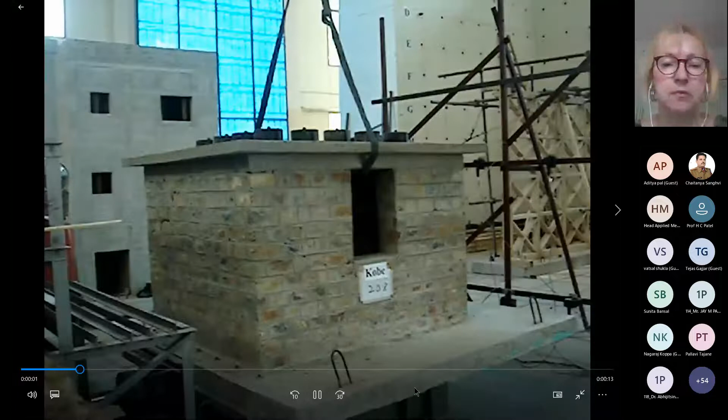Were you able to hear, to see the video? Madam, we can see the video, but the audio is not there. Audio is okay, that's okay, you don't need audio. One more thing, madam, on the screen you can see one stream, so you can press the hide button so that it is not visible on the screen.

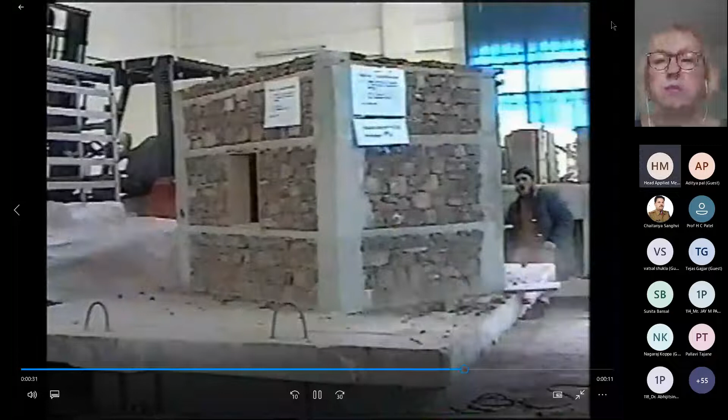Sorry, I was, if I was not, just stop sharing. So I wanted to just show this. This was in the context of the topic of nominally reinforced masonry. I was concerned to exit from the PowerPoint presentation, so I wanted to share. I can repeat this if you want, for some reason, to record it in some other way. But I would now like to proceed with the next presentation.

If you can share this video on WhatsApp, my WhatsApp group, I will share with the participants. I will, those are two videos, both. Yes, and in fact I can also, I have a paper that describes this testing, which is also done by that group from Peshawar. It's worthwhile looking at it.

It just shows the convincing performance. Please note that the reinforced masonry technology had also vertical elements with four bars, which are same as actually confined masonry. So it is in a sense confined stone masonry if you look at it, and really good performance. The tests were done around 2010. So I will share both the videos and the paper that describes the testing with all the details of the accelerations and all that.

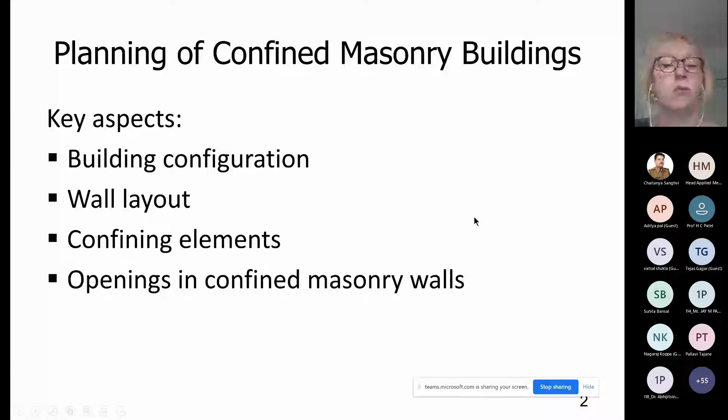There are a few rules regarding building configuration, and they're not specific to masonry. We numbered these rules and labeled them. So rule BC, building configuration 1: plan should be regular whenever possible. If possible, it would be good to have a regular plan like shown on the left-hand side, as opposed to this U-shaped plan, which is common in India, in many buildings, where we have so-called re-entrant corners, circled here, which are a source of additional increased stresses and forces and damage in earthquakes.

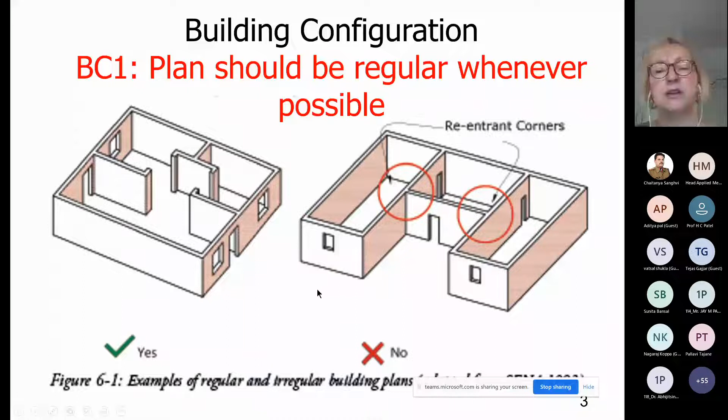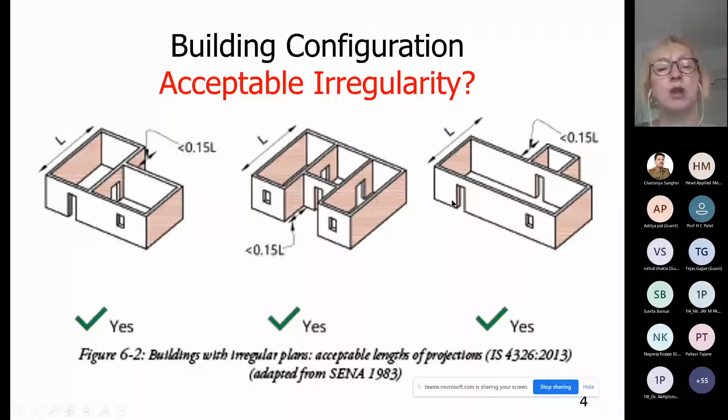Acceptable offsets or irregularities, let's say up to 15% of the length of the dimension we are considering, are shown on these diagrams. What is possible to do, maybe some unrealistic cases like the one on the right, maybe a very small room or something. But anyways, if we have irregularity, we set a limit to it if possible. Or alternatively, for small buildings.

These are conceptual diagrams. It is possible and feasible, if we have larger blocks, let's say schools, to create a separate seismic gap between the blocks, so we get regular rectangular blocks which behave as separate buildings, separate structures in an earthquake. So it's always possible to create these gaps.

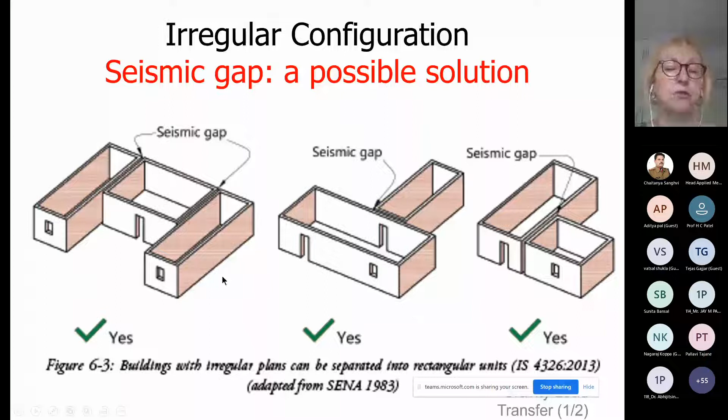Of course, it comes at a cost, because we need to have a double system on each side of the block, like a separate wall on each side to complete each building. There will be some openings, because these are still combined buildings, but for the purpose of seismic design, they will be considered as separate structures.

For example, at IIT Gandhinagar campus, which I will be talking about in the following days as a case study of confined masonry application in India, this is an example of a student hostel. You can see all these different colored blocks are separate. Even though it looks like one building, the different wings are separate structures, and there are gaps at these locations shown here.

Interestingly, the building at the lower right corner is the staircase block. This was designed as a RC frame, reinforced concrete frame, so most of the building is confined masonry except for this. We'll be talking about that, and Mr. Anal Shah will also talk about it as the structural engineer who designed these structures on IIT Gandhinagar campus.

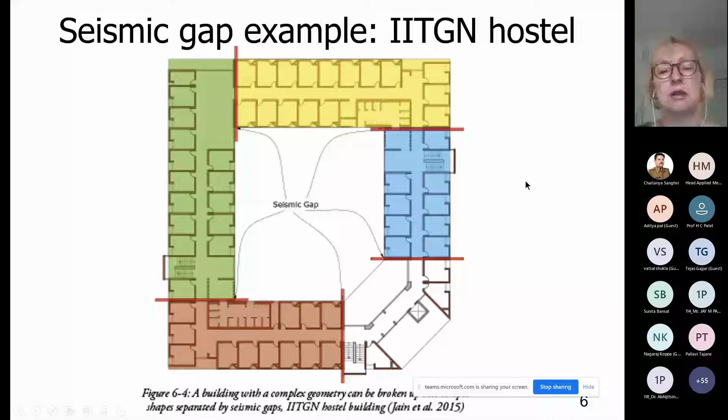The other rule, which is not related to confined masonry but is general when it comes to planning of buildings, is length to width ratio of an individual block or building: the ratio should not be more than 4. That is a general rule, because in very long buildings there may be some unfavorable effects of vibrations due to the length.

It is also true that in long buildings there could be more significant out-of-plane seismic effects. So it's always good to have, as shown here with the green checkmark, a more regular and not too elongated plan shape.

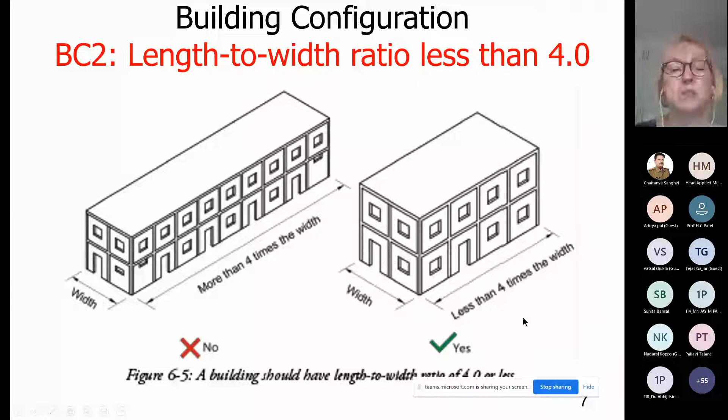So these are all, as I said, figures from the confined masonry book. It is figure 6.5, so you can see even the figure numbers. I hope you will read chapter 6 and get familiar with it. There is accompanying text there.

So adjacent buildings may be in configuration where, if the blocks have different heights, they must be separated by a seismic gap. It is recommended anyway, and the size of the gap is usually prescribed by the codes, so that if the two buildings vibrate out of phase, there is no pounding or collision between the blocks. This is a little exaggerated on the right-hand side, but shows a sufficient gap size.

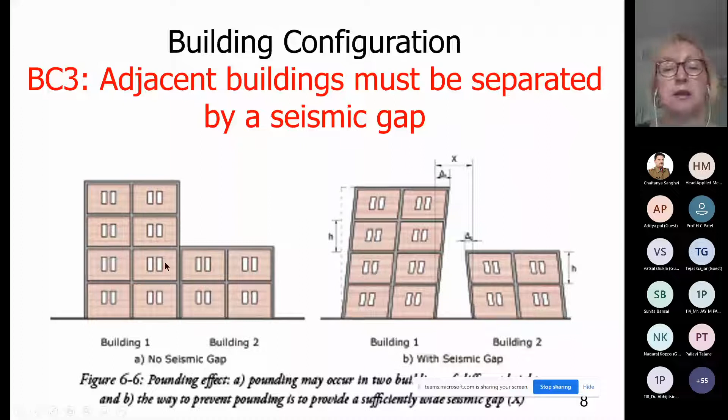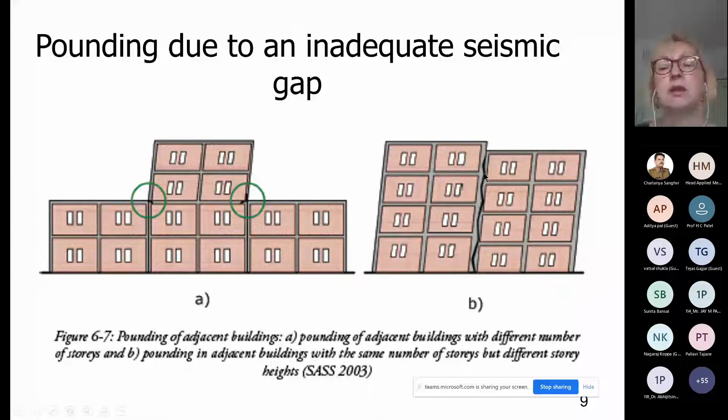Pounding is very common in earthquake situations. This is an example of pounding. It can happen if buildings have different heights, or if buildings have similar heights but, as in diagram B, the floor levels are different. So if buildings are adjacent and there is no sufficient gap, at least the floors should be at the same level, meaning the floor heights need to be the same.

What is very important for wall structures is that there is continuity of walls from the ground to the roof. So the drawing on the left is not acceptable, while the drawing on the right is a must. We must have continuous walls; walls cannot be offset in a masonry building.

Perhaps this kind of situation may be acceptable in concrete frame structures, though I think it wouldn't be acceptable in frame structures either. But in wall structures, the walls are the key elements and have to be continuous. Maybe partition walls could be offset, but load-bearing walls have to be continuous.

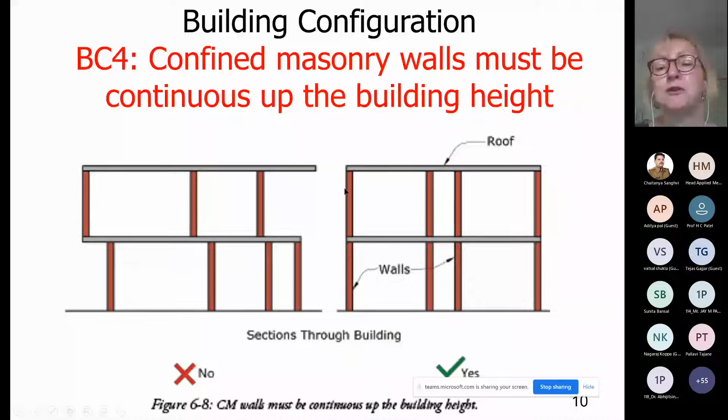Here is an interesting point, which I think is particularly relevant since India is at the beginning of applying confined masonry: buildings with open ground floors. There are many of them in Ahmedabad, and everywhere in India, in all cities, because they're used as parkades.

Nowadays more buildings have underground levels, which is good. But if a building doesn't have an underground level, in many cases the ground floor is left open in reinforced concrete frame buildings, used for parking. We know these buildings performed poorly in the 2001 Bhuj earthquake—a number of buildings in Ahmedabad of that type collapsed. And still many buildings are being built with that feature.

So in confined masonry, it is a big no to have an open ground floor. In that case, you would need a reinforced concrete frame system at the ground floor, since it wouldn't be confined masonry anymore, with confined masonry on the upper floors. This so-called hybrid system is not permitted in confined masonry, and not permitted by the code. Confined masonry can only be done with a continuous system, continuous walls from the ground to the top.

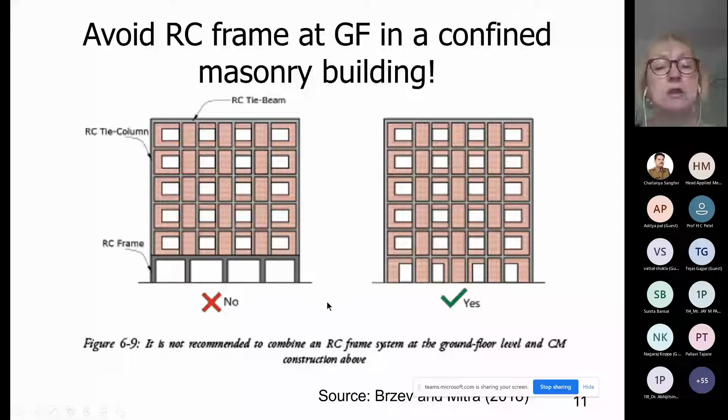This poor performance or collapse of buildings with the hybrid system has been documented in China after the 2008 Wenchuan earthquake—there's a paper in the book that clearly shows the performance of these buildings. I also visited Albania after the 2019 earthquake, and they had exactly the same system with an open ground floor.

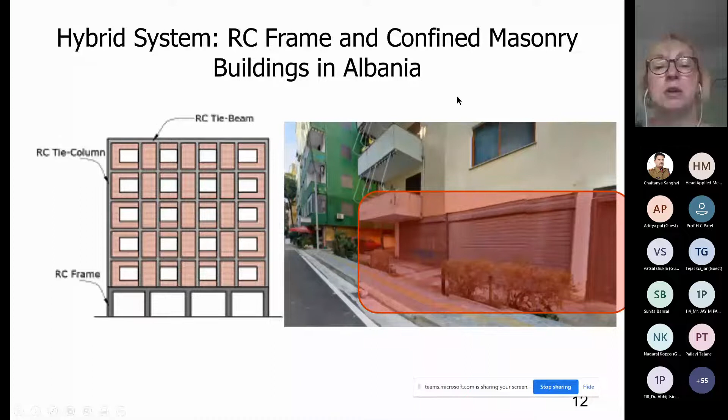As I said, this is also very well documented in papers from China after the 2008 earthquake. Confined masonry buildings in China performed very well, except for buildings with this hybrid system. So it's very important not to consider it at all as an option for confined masonry buildings in India—it is not permitted.

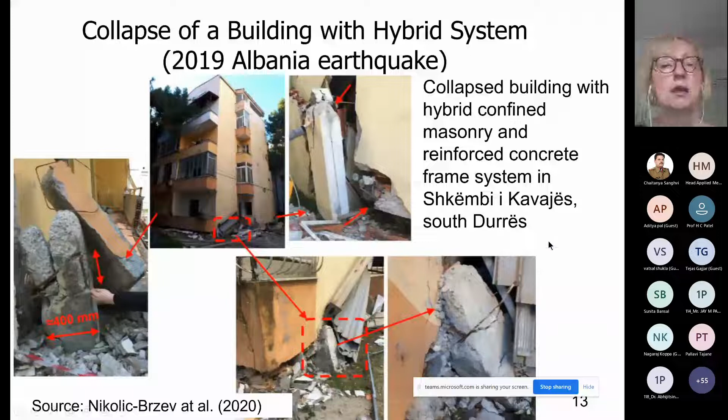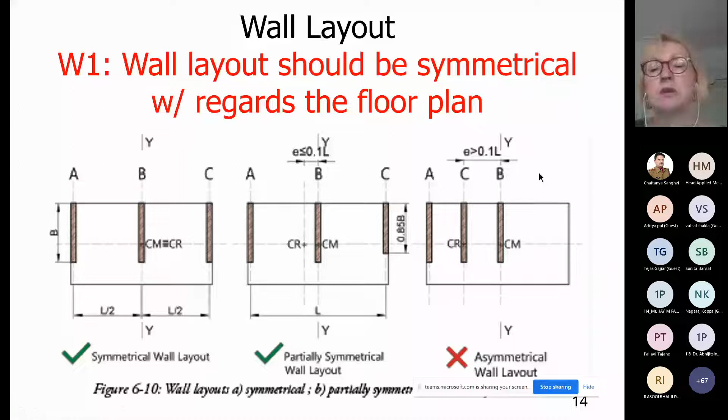This large eccentricity between center of rigidity and center of mass causes torsional effects. These effects and the increased forces from torsional displacements can be controlled by design, but it is not favorable—it's not desirable, though necessary in some situations. These are recommendations, but in real design it's not always possible to follow them. Another important aspect for all masonry buildings, including confined masonry, is that a minimum of two parallel lines of walls is necessary in each direction.

This is usually a part of the codes. We cannot have less than 2 load-bearing walls, which in this case are confined. That is the minimum, even in smaller buildings. Let's say we have a building with 4 walls, that means we have 2 walls in one direction and 2 walls in the other direction. So this is that box type structure.

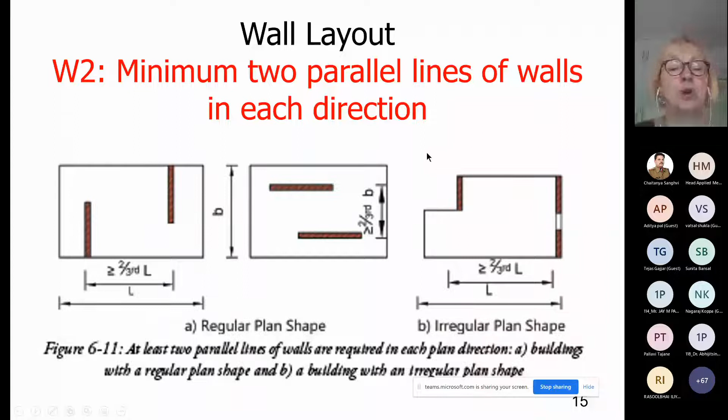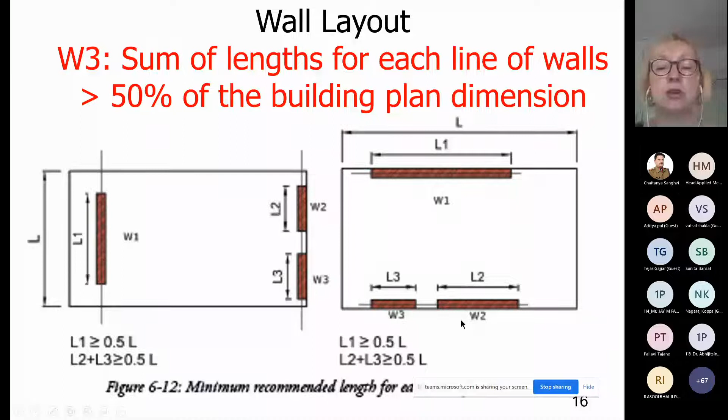Finally, if we have separate walls, like W2 and W3 shown here, the sum of lengths of these walls has to be greater than half of the length of the side of the building L. If you have 1 wall, the length should be greater than half of that length. If you have 2 walls, when we add their lengths, they should be larger. In other words, most of the line has to be covered by the walls, it must be supported by the wall. This is the same shown for both directions. These diagrams are exactly identical, except that they show walls in vertical and horizontal direction, the way it is shown on this plan.

Now we are talking about confining elements, and in the code we will show some recommendations from the masonry guide, not from the code, but I believe the IS code would have similar dimensions. When giving an overview of the code, I will show you where this part is, so you don't need to memorize, you can check.

Here are some rules for tie columns. So obviously in the confined masonry wall, we have 2 tie columns and a tie beam. I consider this tie beam as a tie beam at the floor level. An additional band is not considered as a tie beam, it is just a band, which is a provision, but tie beam is at floor level or roof level.

Tie column dimensions are as prescribed by EERI guide and I believe by Indian code: the length is at least 150 millimeters and the other dimension is 110, which means it will be possible to construct a half brick thick wall. But from the practical point of view, this is next to impossible because we need 4 bars and it will be very difficult to construct 4 bars at such a small size. That's why I said that in most applications I would expect to have 230 by 230 millimeter size tie columns.

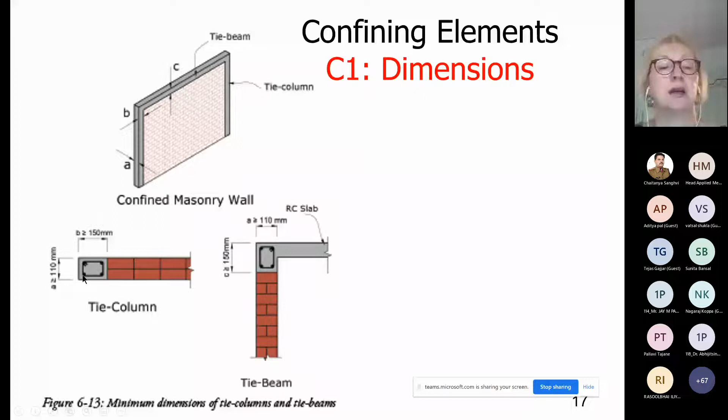So that beam at the edge would serve the purpose of the tie beam, it is not a separate beam. Only, as we will see in confined masonry, the tie beam would only work for tension and compression, it would not act in bending or shear. That is the only difference. Otherwise it looks the same as the beam that would anyway be part of the floor system, which is nice. Tie column is extra, obviously, it would not be a part of the RC floor system, it is a vertical element anyway, but that is it.

It is true that even though we don't consider this wall, it will take part, it will resist part of seismic forces, but we simply don't consider it. That is how it is.

That is also another very important rule. So in planning of, for example, IIT Gandhinagar campus, not every wall in the building that I've shown and the other buildings were considered as confined. They are part of confined masonry buildings, but walls were not treated as confined masonry walls.

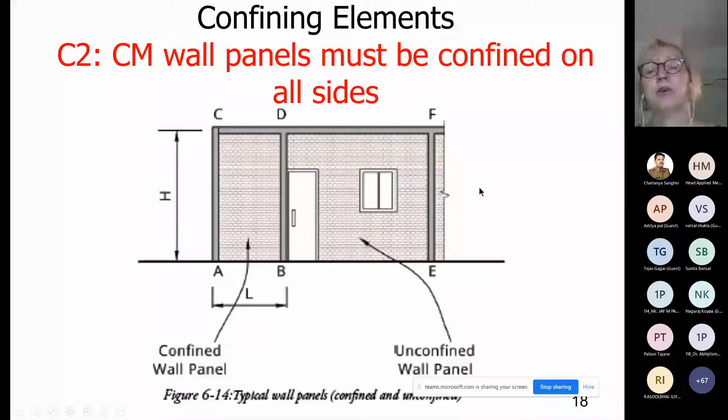So these are now the rules that are included in that chapter 6 and also, as I said, in the code, and they are now numbered. So this is more specific than what is shown in the previous lecture.

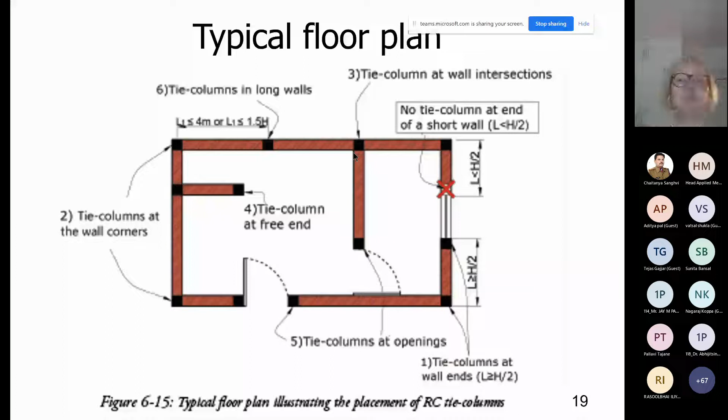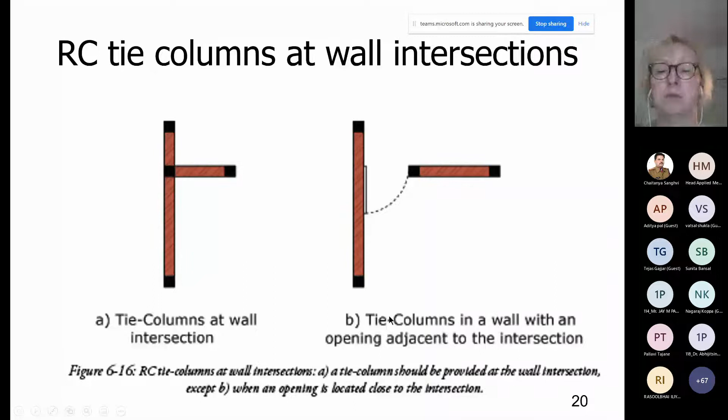This is an example from the IIT Gandhinagar campus construction: if we have an opening in the wall, then we don't need to have confinement at the end of that cross wall, as shown in diagram B. You can see on the left wall, because there is a solid wall, there is confinement at the wall intersections. In this case, when we have an opening, we can have the first tie column at the end of the opening. There is no need for an extra one, unless this vertical wall is very long, in which case there would be a need for an extra tie column. We had this discussion during the planning of the IIT Gandhinagar campus. So that is an interesting rule.

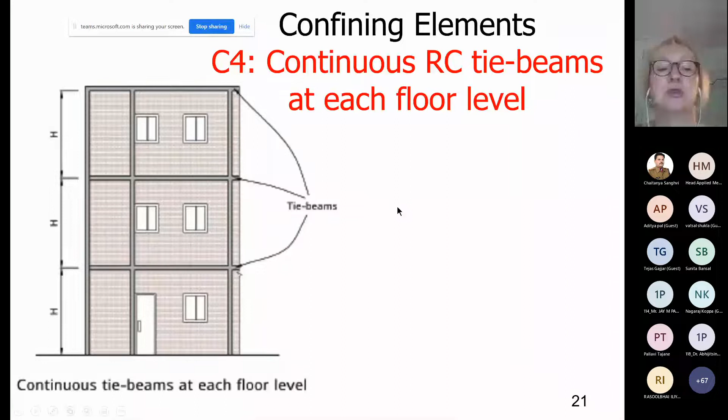And we talked about continuous tie beams at each floor level. As I said, you can consider these tie beams as parts of a floor system, as a floor structure. In India, it is required to have a lintel band when the floor height is more than 2.5 meters, and that is the case in practically all cases. So I would expect that all confined masonry buildings in India will have an RC lintel band in addition to this beam. This would be an extra expenditure in confined masonry, which is not there in other countries, but it is simply based on Indian practice to date on reinforcing masonry.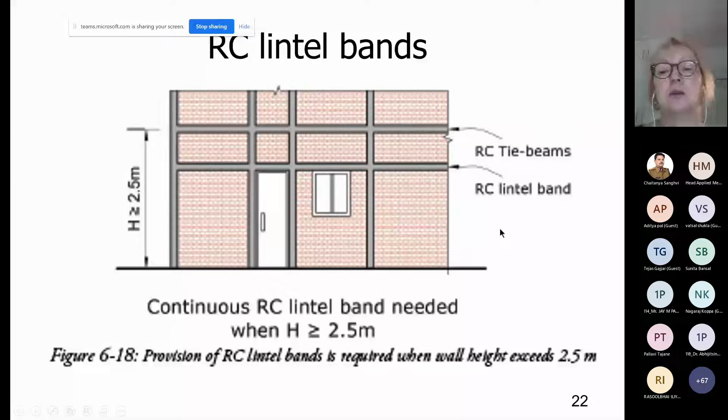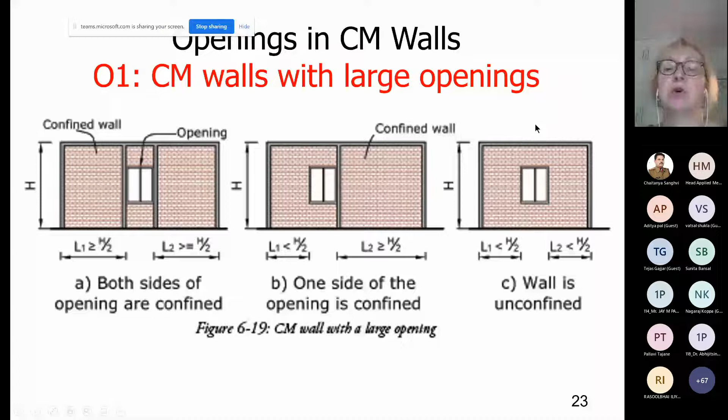The third, diagram C, shows a wall which is confined only at the ends, but not confined at the openings. Also, the distance between the end of the wall and the opening is less than height over 2 (height being the wall height at floor level). Therefore, this wall is unconfined, so it would be disregarded or not considered in the seismic force calculations and distribution. It would not be assigned any seismic forces. Of course, it is there, it would carry gravity loads and would also resist some seismic loads, but it would not be designed for seismic loads. So it is maybe also a margin of safety to disregard some of these walls, even though they will take some loading.

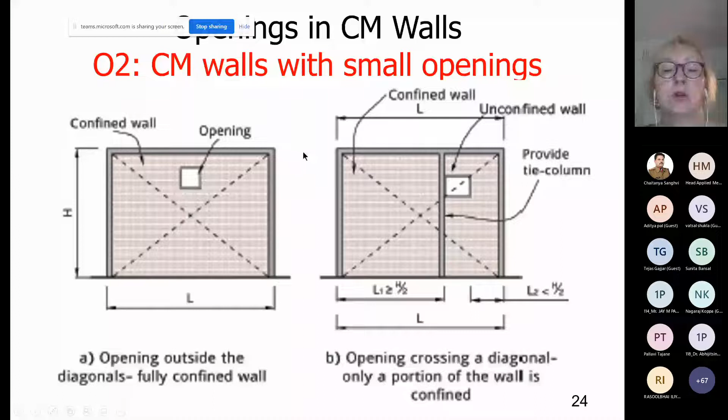If it is on the diagonals, like in diagram B, then we can put a confinement. The part that is solid without openings will be considered as confined wall, while the part on the right-hand side of the opening is not considered confined. So you can see confined wall, unconfined wall. In this case of small openings, we don't need to model openings or include them. We will just consider this as a solid wall, which would be sufficiently good for design.

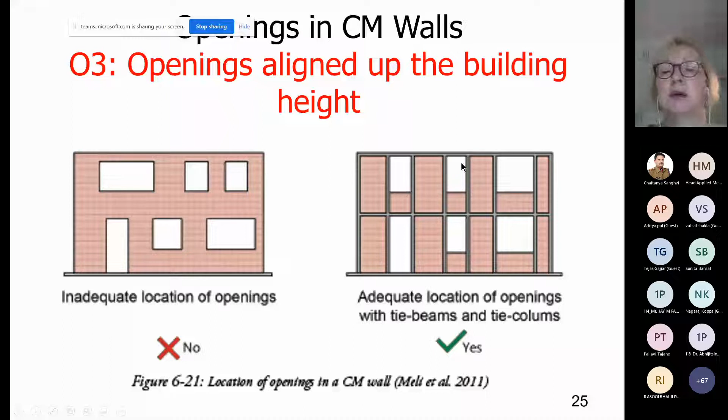Openings need to be aligned. That is a rule about openings - they have to be aligned up the building height. The drawing on the left shows scattered openings which are offset from one floor to the other. In confined masonry, we need to have openings aligned vertically so that we can place confining elements continuously up the building height. That is critical in planning of confined masonry buildings.

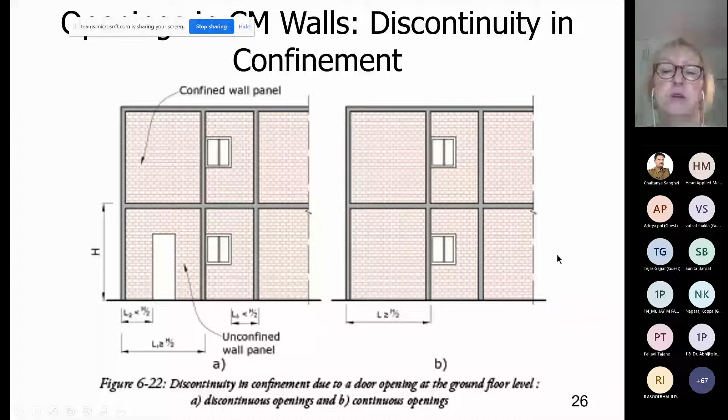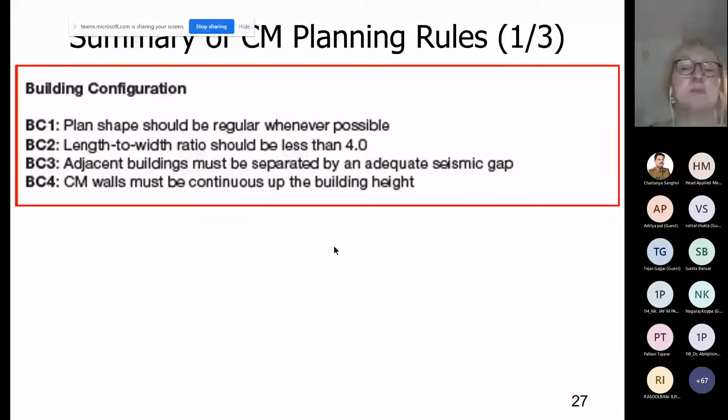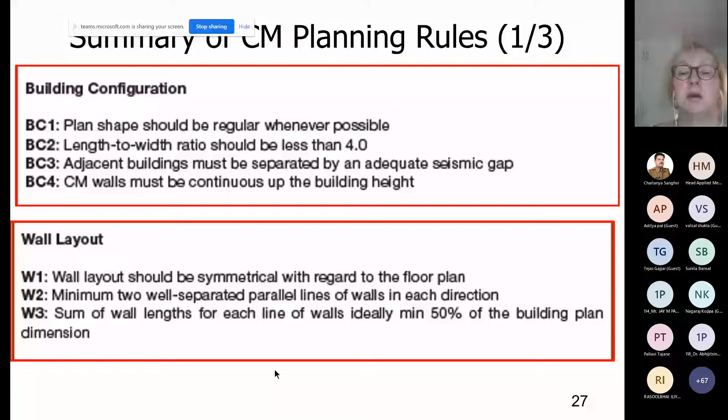Regarding wall layout rules: wall layout should be as symmetrical as possible with regards to the center of the floor plan, the centroid of the floor plan. Minimum 2 well-separated parallel lines of walls are necessary in each direction, and also the sum of wall lengths for each line of walls should ideally be a minimum 50% of the building plan dimension.

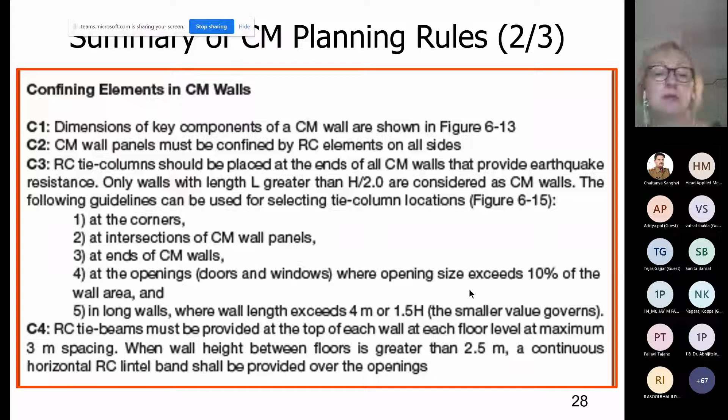Confining elements in confined masonry walls - C1, dimensions of key components are shown. Wall panels must be confined by reinforced concrete elements on all sides. Rule C3 is about the locations of tie columns, which are shown and summarized - they were shown on the plan drawing. Rule C4 is that reinforced concrete tie beams must be provided on top of each wall at each floor level at maximum 3 meter spacing. When wall height between floors is greater than 2.5 meters, a continuous horizontal band shall be provided over the openings.

Finally, a few rules regarding openings. Rule O1: tie columns should be placed at both sides of any opening with an area of more than 10% of the wall surface area for one confined masonry wall. Otherwise, the wall should not be considered as a confined wall. The second rule is for walls with small openings - if the opening is outside the diagonal, it can be ignored. When it is on the panel diagonal, an RC tie column must be provided at the opening, otherwise the wall is not confined.

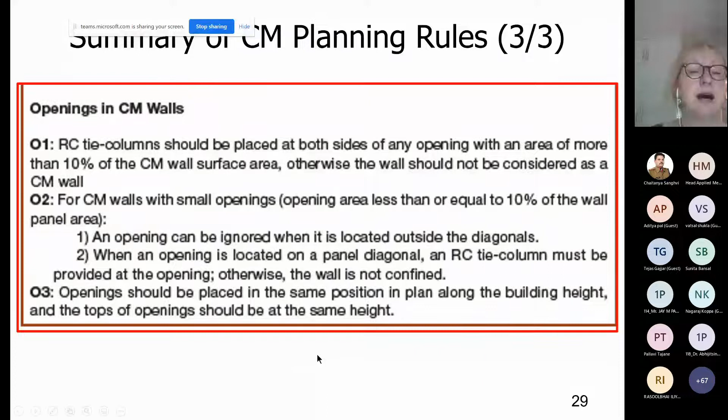O3: openings should be placed in the same position in plan along the building height, and the tops of openings should be at the same height - that is what is shown. So that is all about this planning of confined masonry buildings. It is all explained in detail in chapter 6 of the book, which is also assigned reading for you in preparation for tomorrow's classes. Now the second topic, which will be just a few slides but maybe more discussion and explanation, is load transfer or force transfer in confined masonry buildings. I put masonry buildings because it is the same whether it is confined or any other form of masonry building.

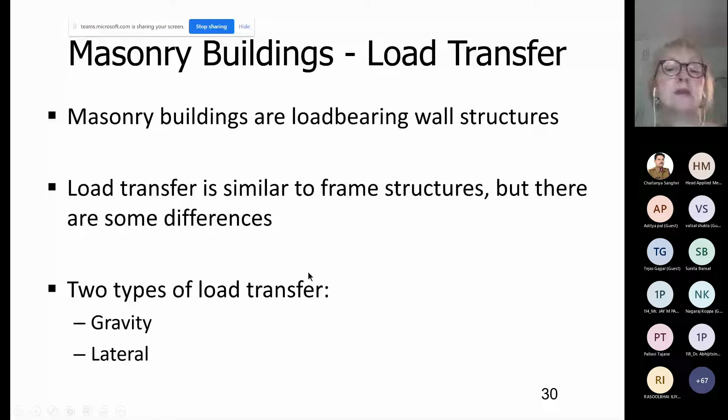Masonry buildings are load-bearing wall structures. Load transfer is similar to frame structures in some ways, but there are differences. There are two types of load transfer: gravity loads and lateral loads.

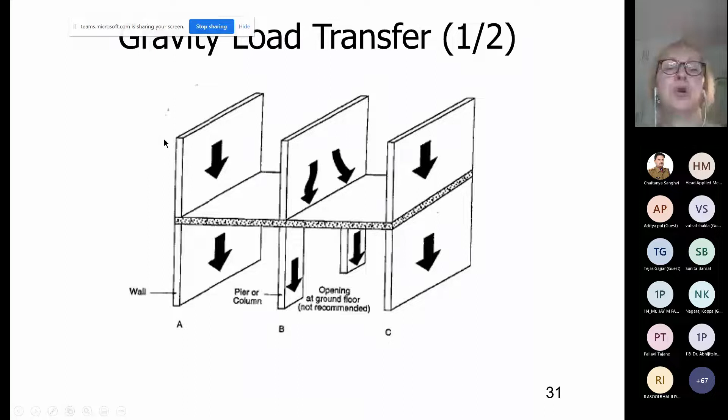For gravity loads, if you have floors or a roof above, all the loads will be transferred to the walls. That's why they're called load-bearing walls. How do we calculate the loads in the walls due to these vertical loads?

It is similar — this is a parallel comparison between the wall system and frame system. Let's imagine in grid line AB there is a wall. The tributary area for the wall would be half of the length span on each side of the wall, between that wall and adjacent walls, whereas for columns it would be equal to the span on the other side.

Whereas in a reinforced concrete frame system, the tributary area would be square or rectangular shaped on all four sides around the column. So that is the difference, but the concept is exactly the same. For the column, we take tributary area in one direction and the other, the same as for the wall tributary area — the concept is exactly the same.

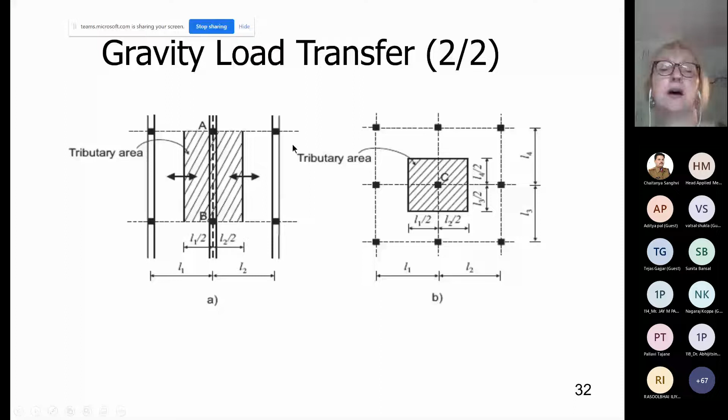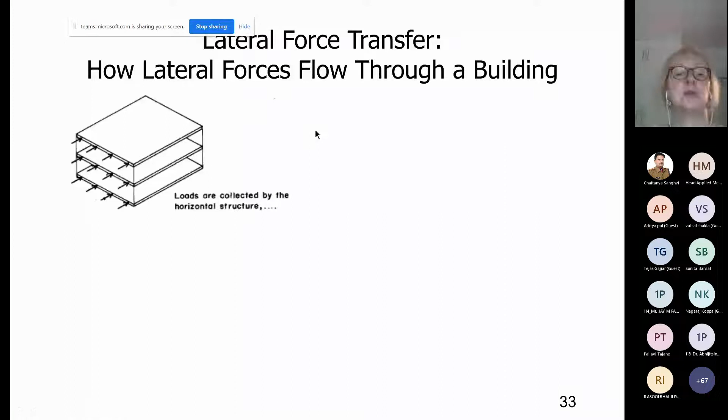That is the message. When it comes to lateral force transfer, or how lateral forces flow through a masonry building, first the loads are transferred to the horizontal elements, which are diaphragms — as we discussed, at the roof and floor level, in case of reinforced concrete slabs.

These diaphragms act — imagine we have walls only at the ends of this building. These end walls act as supports for the diaphragms, for this horizontal loading, and the reactions of this loading, shown in this diagram, are actually the forces that go onto the walls.

You can see the forces transferred at each floor level from the diaphragms to the walls. In this simple case there are only two walls at the ends of the building, but there could be many more. Through this course we will go over the rules or principles by which we can calculate forces in the walls through hand calculations, or numerical models using SAP 2000 software, for which I believe you got the license.

So we have three steps here. Step one: loads are collected by the horizontal structure, the diaphragms. Step two: diaphragms transfer the load to the walls. Step three: we need to consider these loads due to lateral loading in the walls, and design the walls for shear and bending due to lateral loads, and also for axial load or gravity load, as discussed earlier.

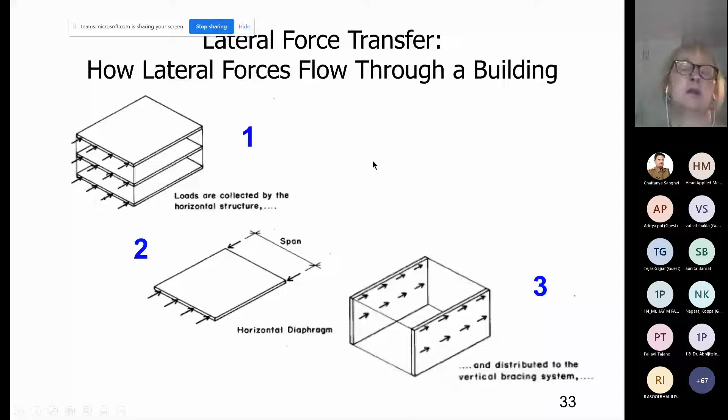Planning of the building is very important both for engineers and architects. In some cases architects may not be educated on this — as we learned, there are challenges in the curriculum of engineering and architectural programs, where they may not have any education related to seismic planning in high seismic zones. That's why you, engineering students, future engineers, practicing engineers, and engineering professors are there to educate them.

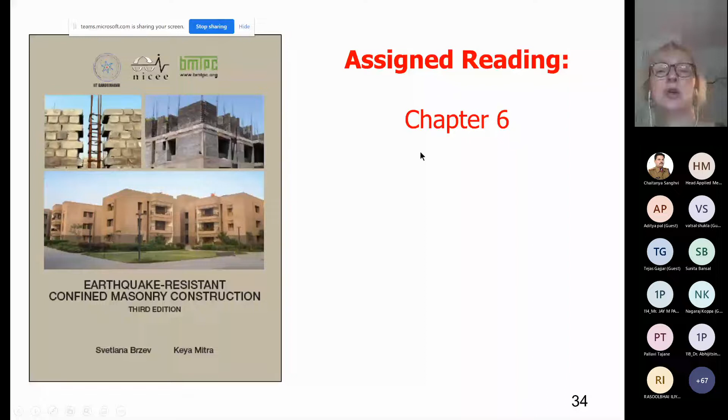In this book, chapter 6 is dedicated to planning, and you will need to go over it. All the illustrations given in this lecture are in chapter 6 of the book. And that is all for this lecture, which was related to planning. Do you have any questions?

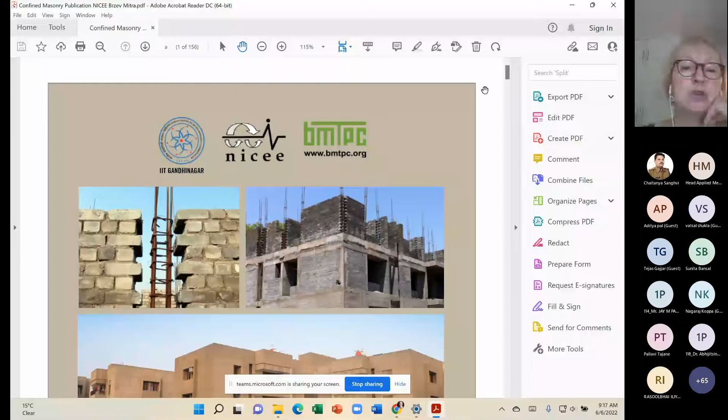So I will go over the book a little bit before — in the meantime you can prepare your questions — and give a little bit of history about it as well. So, as I mentioned, the first confined masonry publication, a larger publication called a monograph, was developed in 2007. I wrote it.

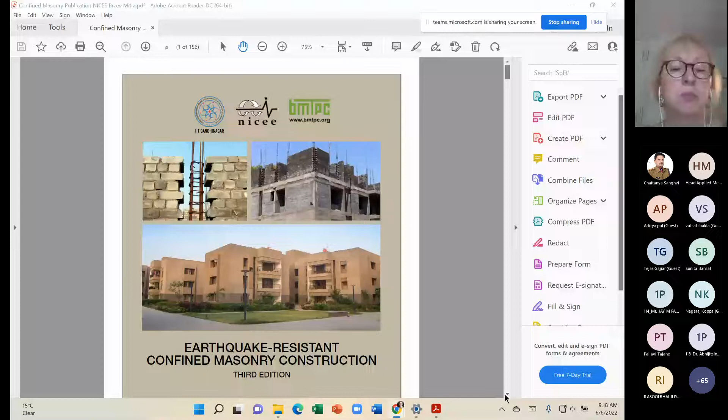I was in India as part of the NPEEE program, convened by Professor Sudhir Jain at IIT Kanpur, where I spent about 3 weeks. I was requested by Professor Jain, Murty, and Rai to write a publication on confined masonry, because at that time there was no experience on confined masonry in India. I wrote the first version of that book, which is available in electronic form on the NICEE website and was also published by NICEE in printed form.

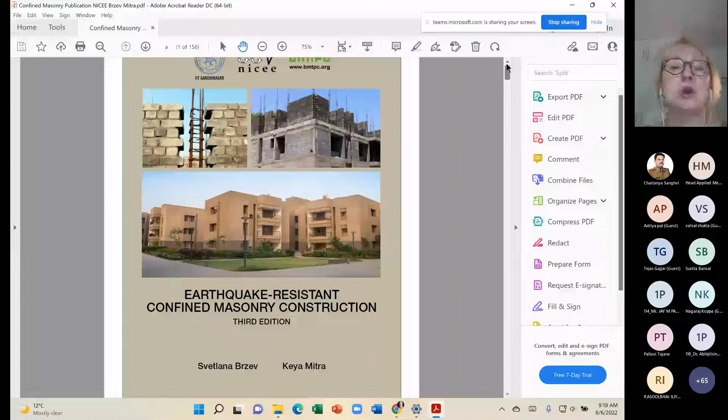On the cover page there is a lot of information and graphics from the construction of the IIT Gandhinagar campus, such as this housing at IIT Gandhinagar campus, and these construction photos of confined masonry buildings.

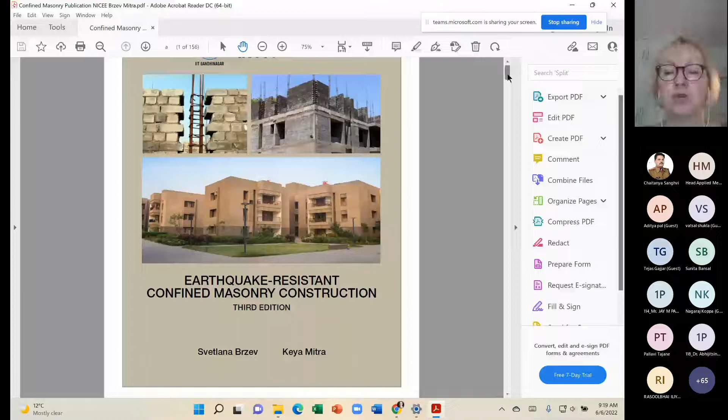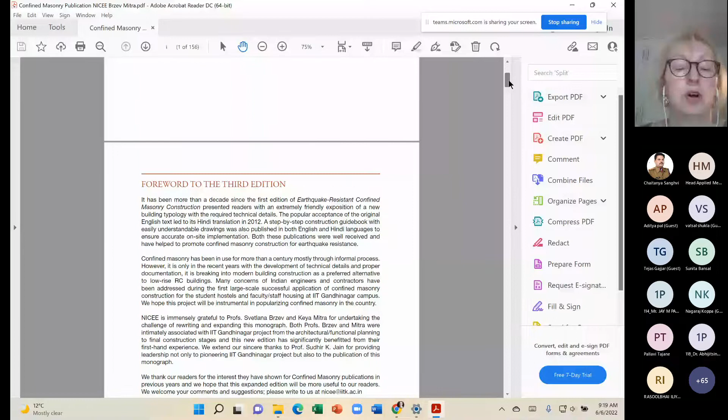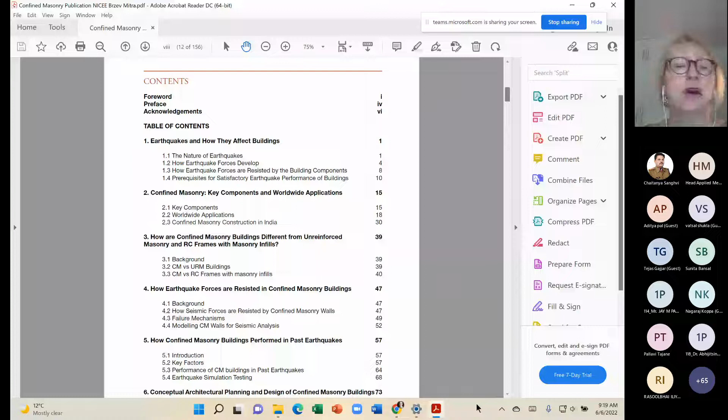This publication has around 150 pages. I'll go over the table of contents to introduce it to you. The first chapter is general, on earthquakes and how they affect buildings, how earthquake forces develop — a basic introduction to earthquake engineering, only the first 10 pages or so.

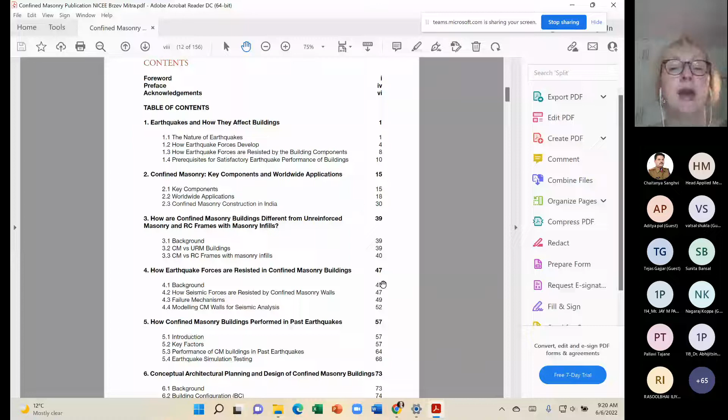The second chapter is about confined masonry, its key components, and worldwide applications — you will see examples of confined masonry construction around the world. The third chapter, which I also assigned to you to read, covers how confined masonry buildings differ from unreinforced masonry, and how they differ from reinforced concrete frames with masonry infills.

The fourth chapter is on how earthquake forces are resisted in confined masonry buildings. We will talk about this as part of seismic design, the topic of designing confined masonry buildings, later this week.

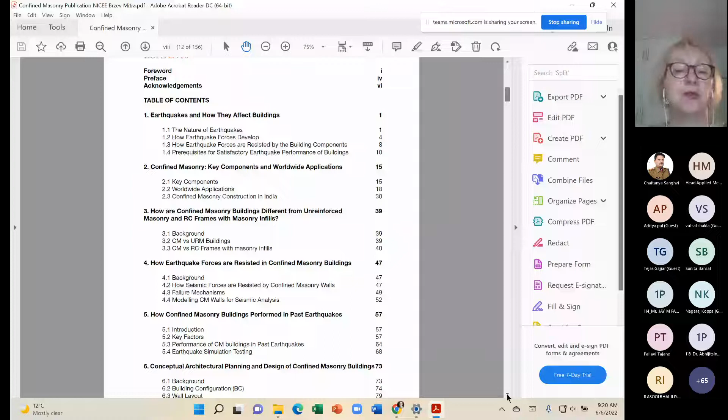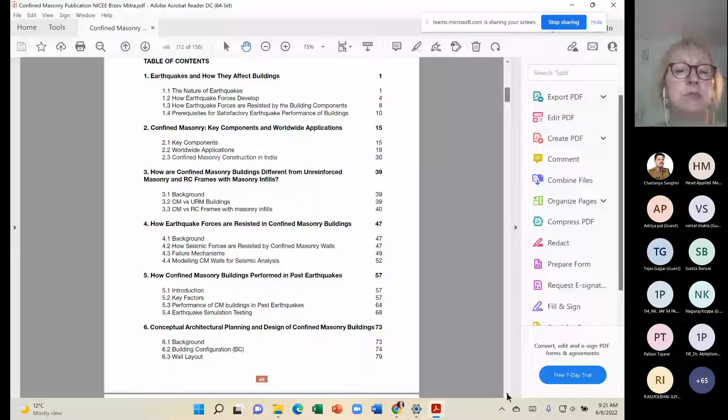We will also have a presentation on how confined masonry buildings performed in past earthquakes — that's chapter 5 in this publication, though I'll show photographs not necessarily only from the publication, as I have my own photographs too. All these chapters are really important to understand the behavior and performance of confined masonry buildings in past earthquakes.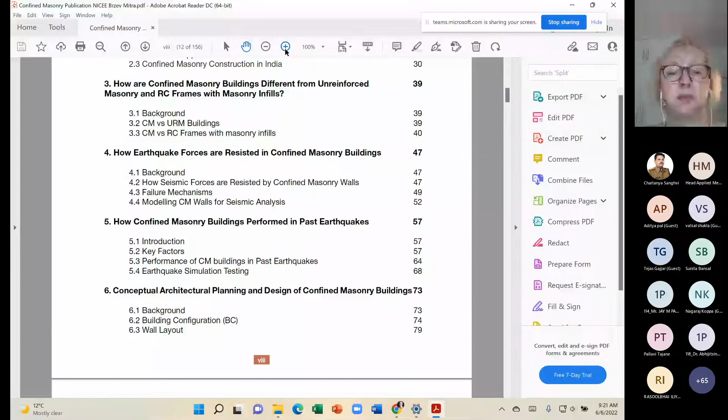Chapter 6 is conceptual architectural planning and design of confined masonry buildings, and it is exactly what was covered in this lecture — that's why it's an assigned reading.

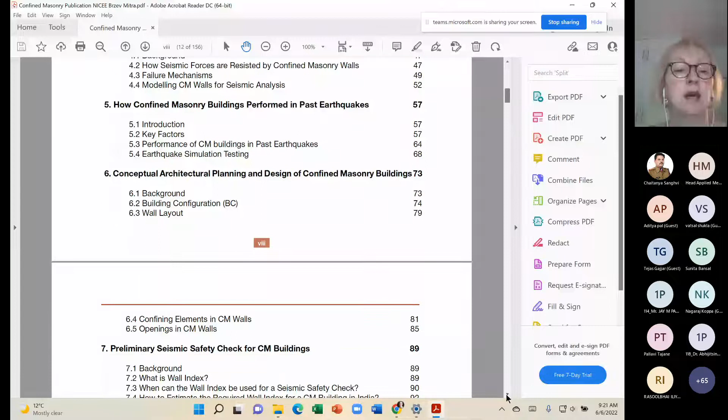Chapter 7 covers the preliminary seismic safety check for confined masonry buildings. It talks about the so-called wall index approach, a simplified method for checking the adequacy or amount of confined masonry walls in a building. Tomorrow we will have a lecture on this simplified method for seismic design, based on the wall index. It's very useful because it gives insight into whether, before doing detailed analysis or design checks, this amount of walls is sufficient or not.

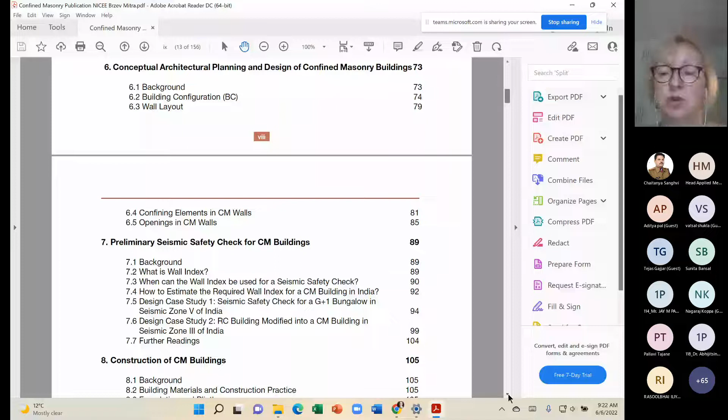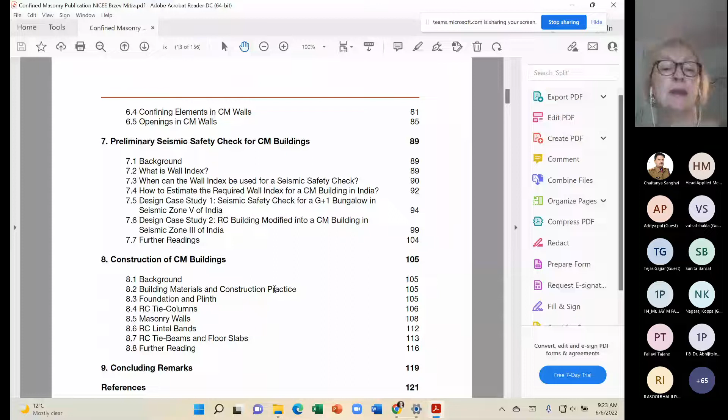Chapter 8 is also of interest: construction of confined masonry buildings, including building materials and construction practice. Tomorrow we'll have a lecture on building materials for masonry, which is also important for design. It goes back to understanding the minimum requirements of materials for confined masonry. As mentioned by introductory speakers, confined masonry is a forgiving practice that does not require advanced skills, which may make it more suitable than reinforced concrete frame construction for some applications. But minimum requirements still exist for any construction technology, including confined masonry, and some rules and guidelines are provided here.

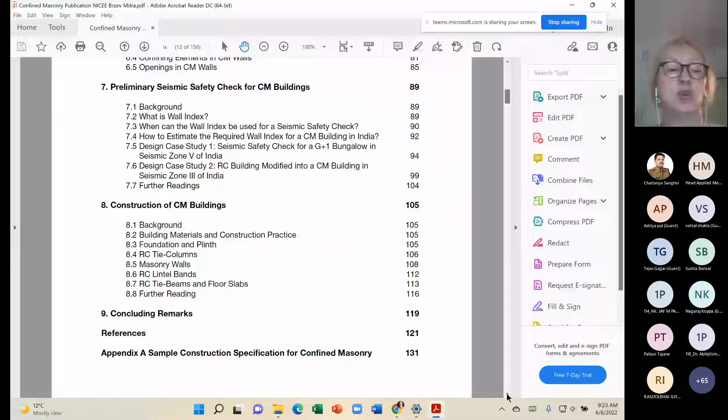Chapter 9 is concluding remarks, and Appendix A includes a sample construction specification for confined masonry, which may interest engineers since such specifications are not commonly available. CPWD in India introduced a specification at the time of the confined masonry construction at IIT Gandhinagar, and this appendix specification is based on the CPWD specification. For this technology to be practiced, a specific and appropriate construction specification is very, very important. That is an overview of the publication.

So their industry has gone so far that they have elements made of masonry which are confined elements, and I shared that with you. If you look at my first presentation, they have a whole industry tuned towards confined masonry, which is beautiful. I'm sure that will happen in India with so many entrepreneurs and capable business people, particularly in Gujarat. Maybe Gujarat will be at the forefront of that movement.

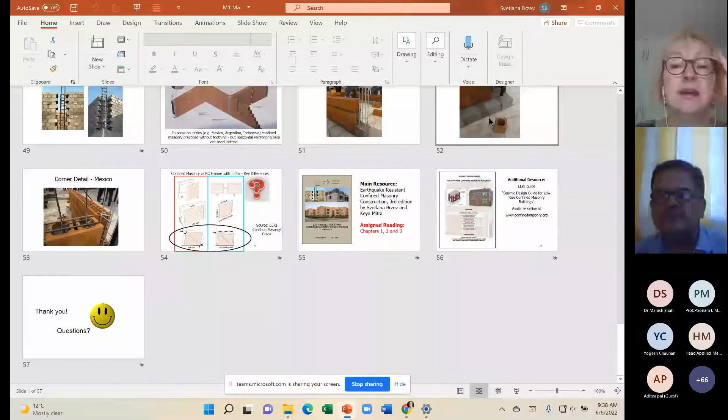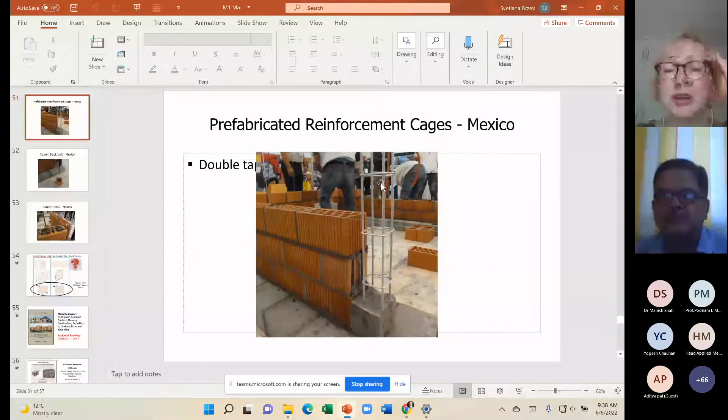So what I showed you for Mexico, I hope will happen in India. They have these reinforcement cages prefabricated. You order 3 meter or 3.2 meter long cages for every floor, and you may place some extra bars there. You can see the masonry element is large enough so that the cage can go into it. So it is a masonry element, but it has to be hollow and large enough.

In the absence of such elements, the next best thing is to use reinforced concrete, which, as you know, is easy to form in any size and shape. So in the absence of masonry elements, we use reinforced concrete. I can say that in most of the world, it would be just like what I explained, with reinforced concrete cast in place.

In Europe too, Eurocode also prescribes confined masonry, and it's used there with concrete elements, but innovations are possible. There is no reason why there could not be a masonry element just like this. But it cannot be done with bricks because it is very painful.

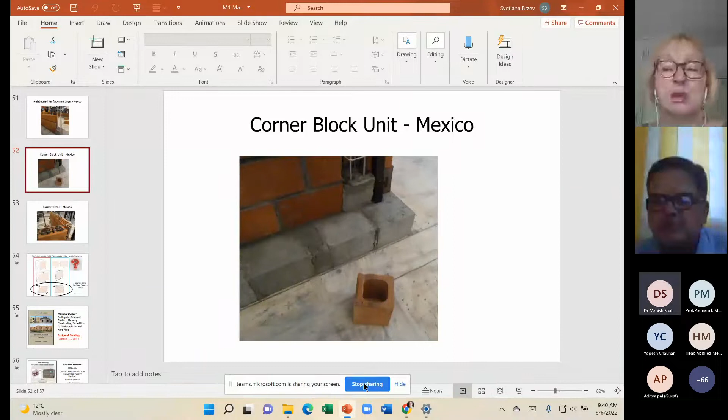I'm not sure if you witnessed construction of vertical reinforcement in brick masonry, but 4 bars are definitely impossible. Even with 1 bar, so much cutting is needed at each corner that I don't see how it would happen with so many required confining elements, especially in larger buildings. It would be so time consuming for the masons and impractical to do. That is simply the reality, but innovations are possible and would be really welcome in India. I'm sure that could be a very good business one day.

Thank you, madam. Thank you. You're welcome. Or, there is the alternative of reinforced masonry.

But people buy them, and even if there is a plant-based production there, they would buy from the private small manufacturing because they were cheaper. So the common man does not know what is good. They know what is the cost. They have their budget and they go by the budget.

Sure, that is sad. Sure, thank you, thank you.

So we have to be careful with the application of this hollow reinforced masonry. The second constraint with reinforced masonry, which I'd like to emphasize, we've seen issues even in the lab. I've done lots of research in Canada, and my own research is on this type of construction, because grouting is the only thing that is done. Once it is grouted, there's no way you can see whether it is fully grouted or not, and whether the grout has gone throughout that height or not. Only non-destructive testing can show this. And during an earthquake, if it was not fully grouted, the reinforcement is usually very corroded. I've seen that in Chile - after the earthquake, it corrodes after a few years, and practically there is no vertical or horizontal reinforcement anymore. So it's a system that requires a high level of supervision and good quality masonry blocks.